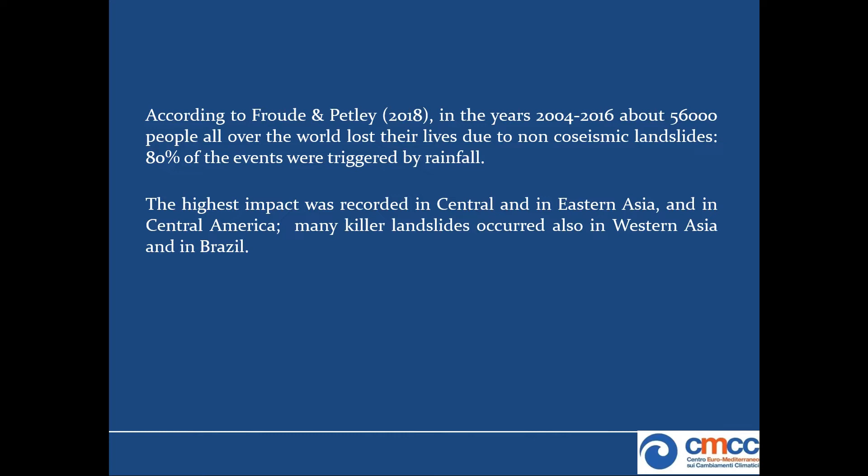A careful survey of the most recent events in the world indicates that the number of casualties due to non-coseismic events in the time interval 2004-2016 has been around 56,000, thus much more than 4,000 per year. The strongest impact has been recorded in Central and Eastern Asia and in Central America. Italy fights for the first place in Europe.

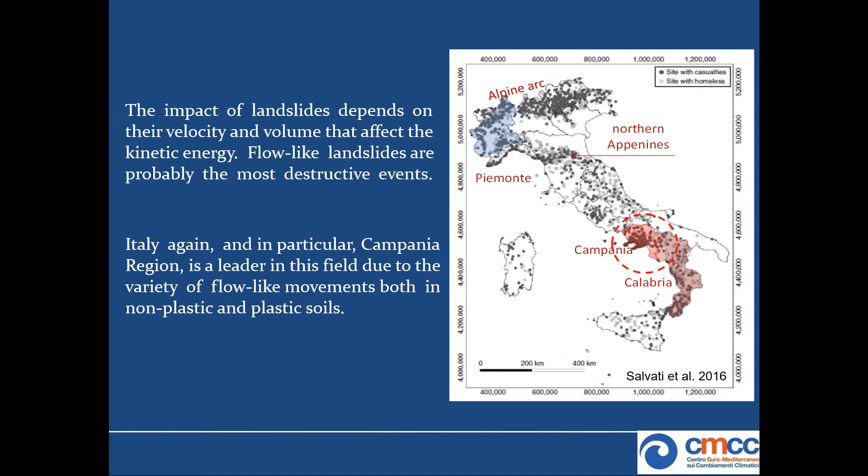Flow-like landslides are probably the most destructive phenomena due to their high displacement rate and often big volumes, thus high kinetic energy. Italy again, and the region where I live, Campania, is a leader for the variety of flow-like movements which involve either granular or plastic fine-grained soils.

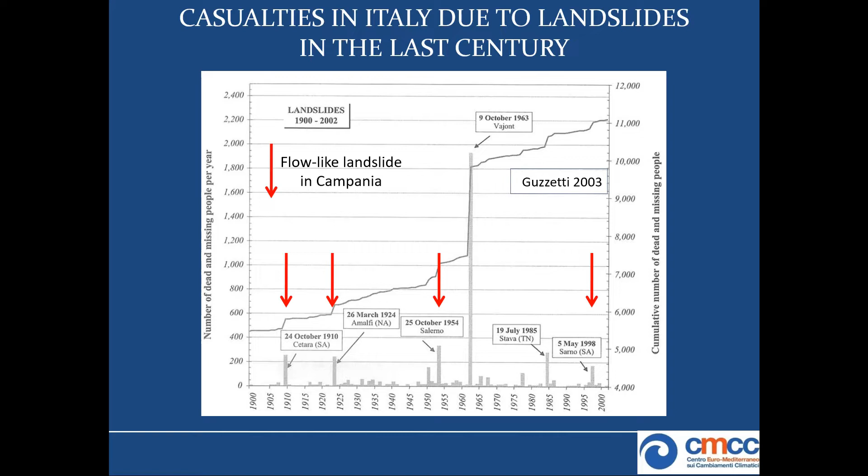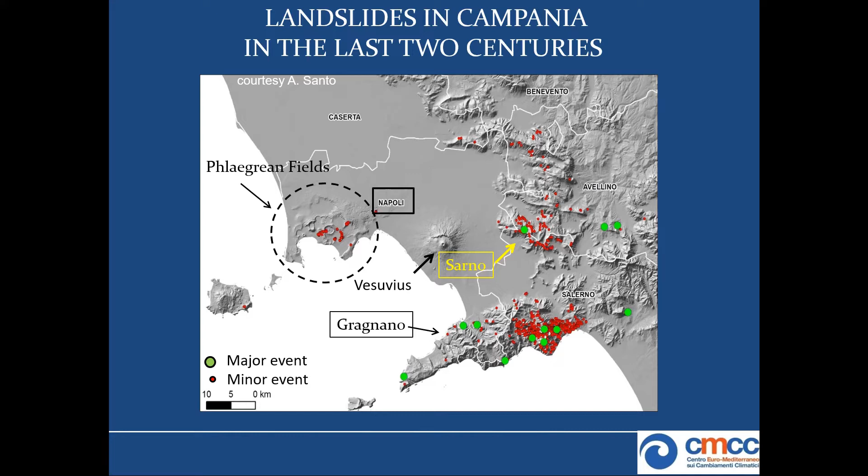This figure shows the location of landslides that occurred in the last 2 centuries in pyroclastic soils in Campania. In the figure, you can notice the position of Naples and of 2 active volcanic centers, the Phlegrean Fields and the well-known Vesuvius, both very close to Naples. The 2 framed localities, Gragnano and Sarno, are the subject of the following 3 slides.

This is the first site, Gragnano, which is famous for the production of pasta. In the figure is indicated the location of landslides that occurred in the 18th century, in the 19th century, and in the 20th one. The figure then suggests the repeatability of these events, some of which caused several casualties.

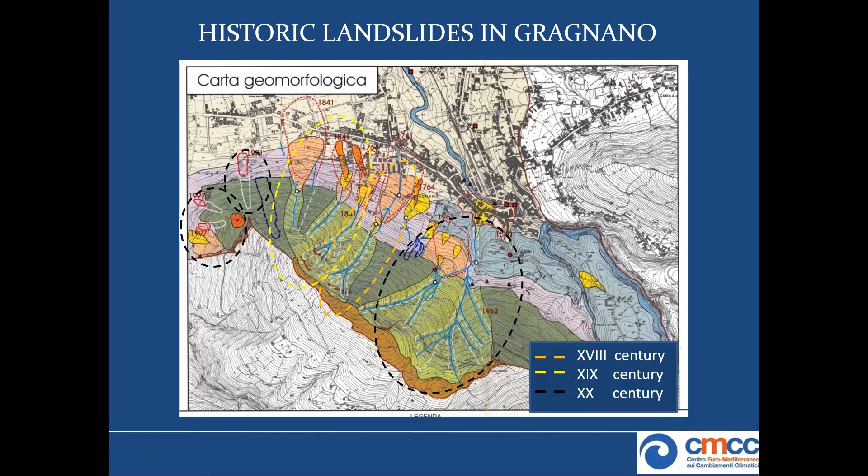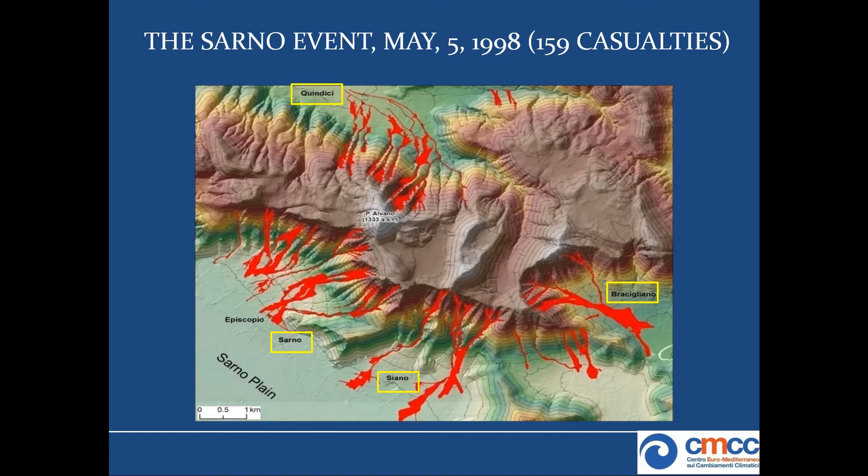It may be useful now to give a look at the typical features of these phenomena. This figure, taken from a book of Brunsden and Prior, depicts the idealized velocity profile, which can be seen also as the displacement profile of a flow-like landslide. It is shown both in plan and in a vertical section. The figure suggests that the soil moves as a liquid mass, displaying a classic parabolic velocity profile. Being seen as a fluid, no shear stresses are indicated at boundaries.

However, remembering that such a profile represents the behavior of a soil mass, the figure suggests the development of high shear strains. An intriguing point is now how to justify at the same time a nil or very low shear resistance at the boundaries of the moving mass and high shear strains within the same soil body.

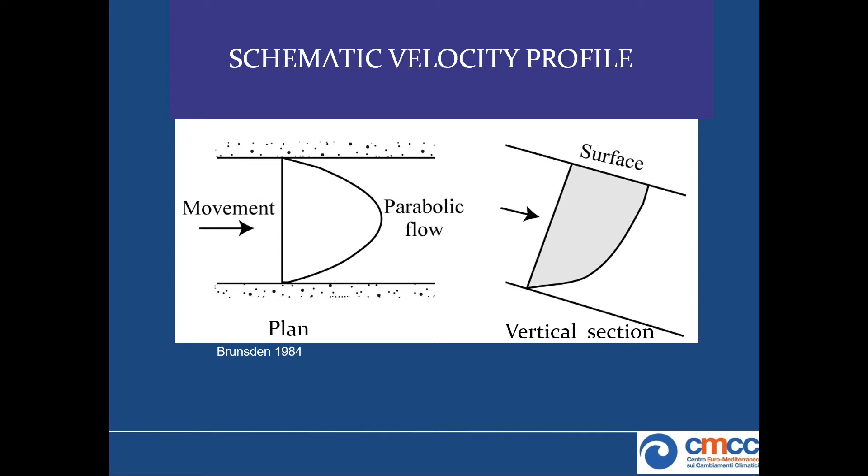The only explanation should be a drop of the effective stresses, which affect both the frictional component of shear strength and the shear stiffness. Such a drop in effective stress might be explained as an effect of a loss of contacts between particles. In a saturated soil, this is possibly due to the building up of high positive excess pore pressures. The drop in strength causes an imbalance between driving forces due to the self-weight of the soil and the decreasing resistance forces. A major consequence is mass acceleration with rapid attainment of high velocities.

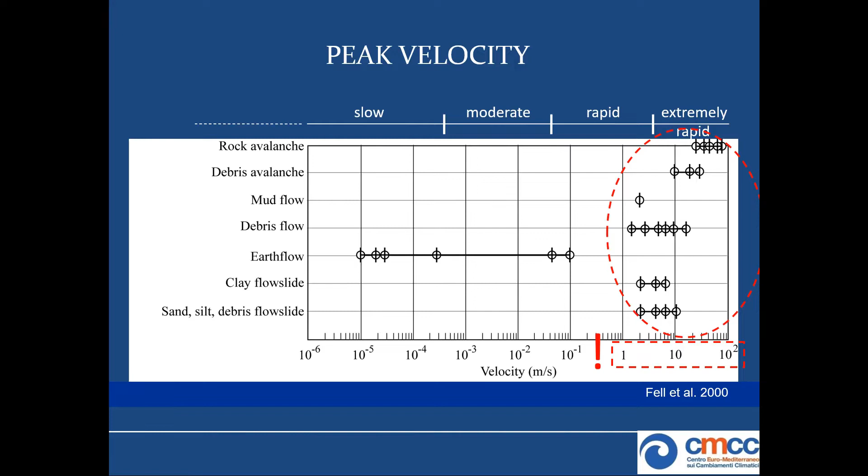This is well demonstrated in this figure taken from a paper by Fell et al., which shows the typical velocities of different types of flow-like landslides. With the exception of earth flows in clayey soils, which can dissipate some energy due to viscous interparticle forces, in all other cases, the velocity reaches values of meters per second.

Now it is time to give a look at the nature of the soils that are the object of this talk and at the features of landslides that occur in such deposits. The soils that fill the plain around Naples and mantle the mountains around are a result of the activity of three distinctive volcanic centers, being volcanic ashes deposited by surges and by pyroclastic flows in areas surrounding the volcano, and by winds, the so-called ashfall or tephra, deposited even 100 kilometers far from the vent.

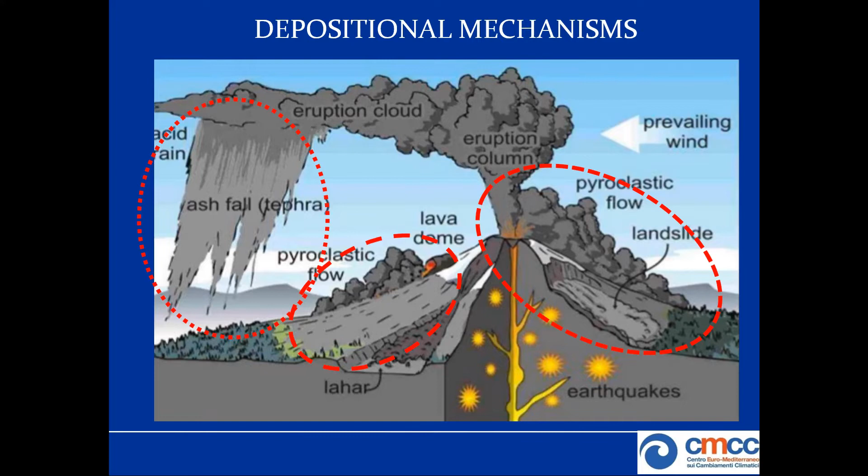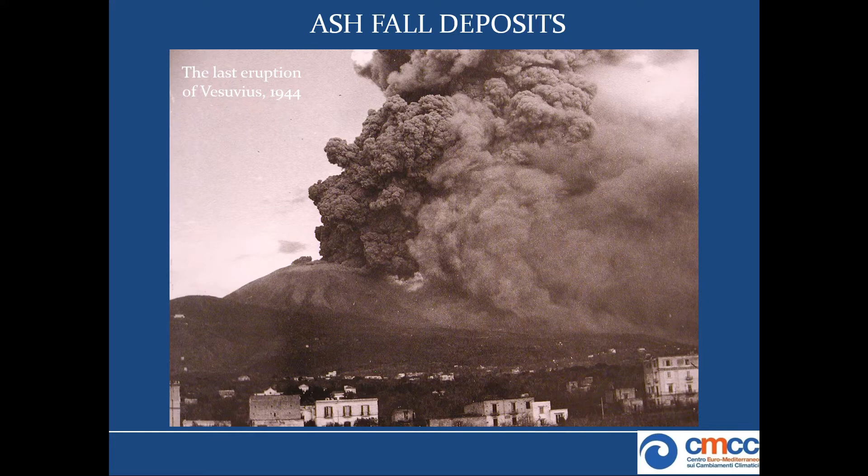The last eruption of Vesuvius occurred in 1944, during the Second World War. The mechanisms of ashfall sedimentation, adding new fresh layers in the pyroclastic sequence, are well evident from these photos.

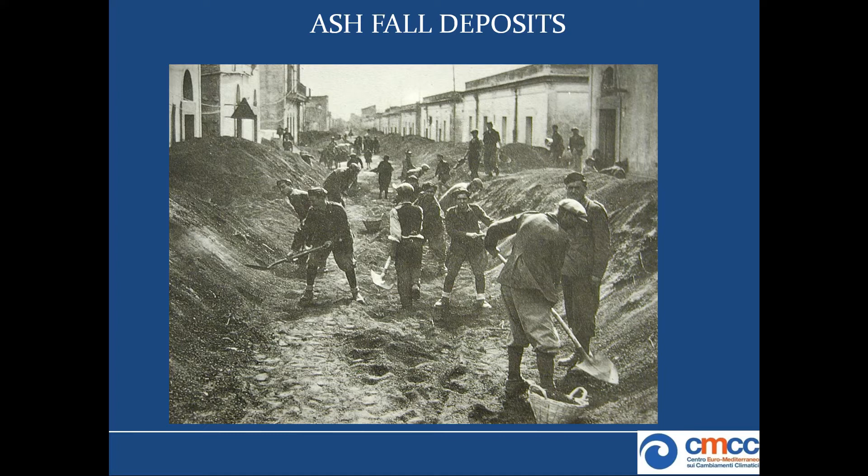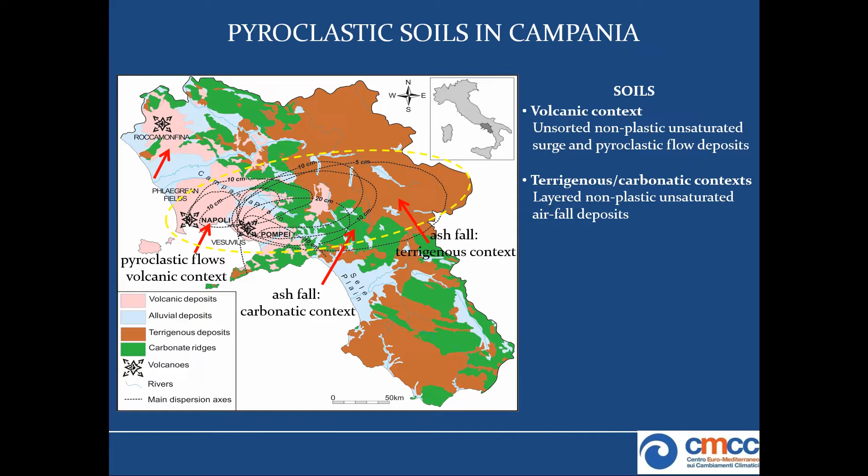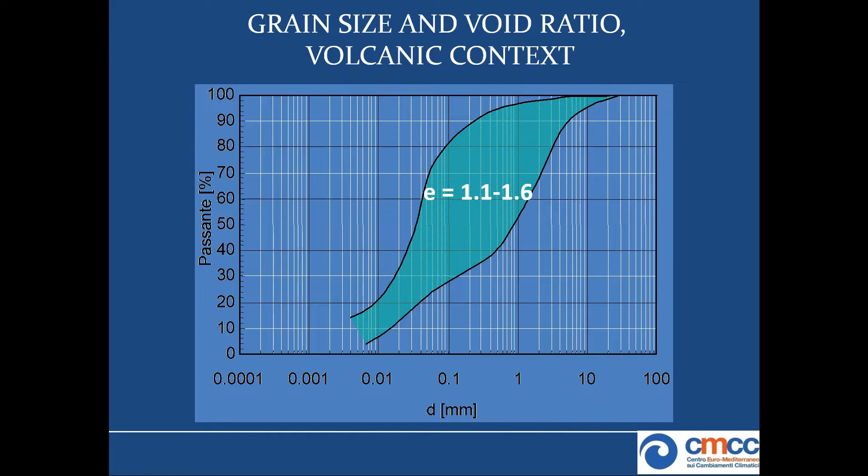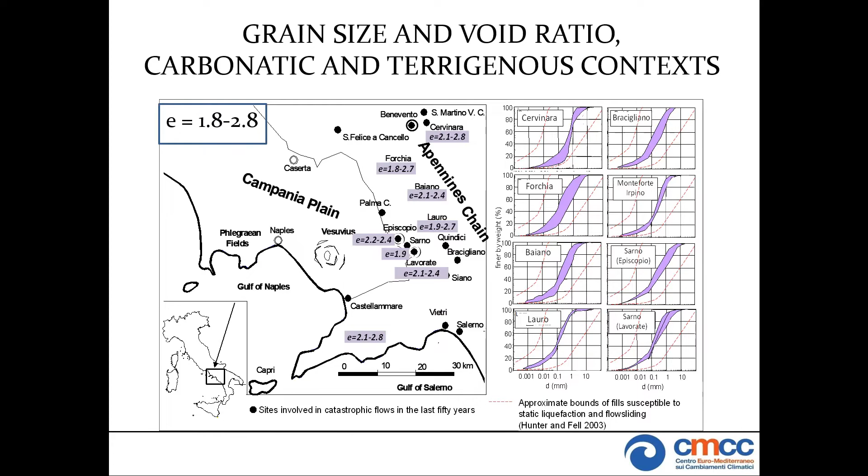Now it is time to give a look to the landslides that occur in these soils. Experience shows that rainfall is by far the primary cause of slope failure. Since these soils are unsaturated, failure is always due to a drop in suction, thus in the apparent cohesion, caused by the increase in water content. Another significant characteristic of these events is that generally they keep the features of flows.

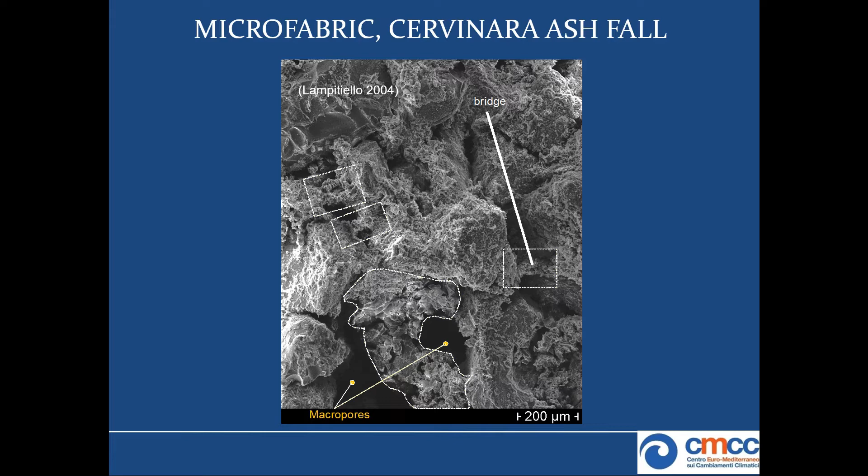Referring to the advanced classification proposed by Hungr et al., these landslides are debris avalanches, debris flows, and flow slides. Debris avalanche is a very rapid to extremely rapid shallow flow of partially or fully saturated debris on a steep slope without confinement in an established channel, while debris flow is a very rapid to extremely rapid surging flow of saturated debris in a steep channel.

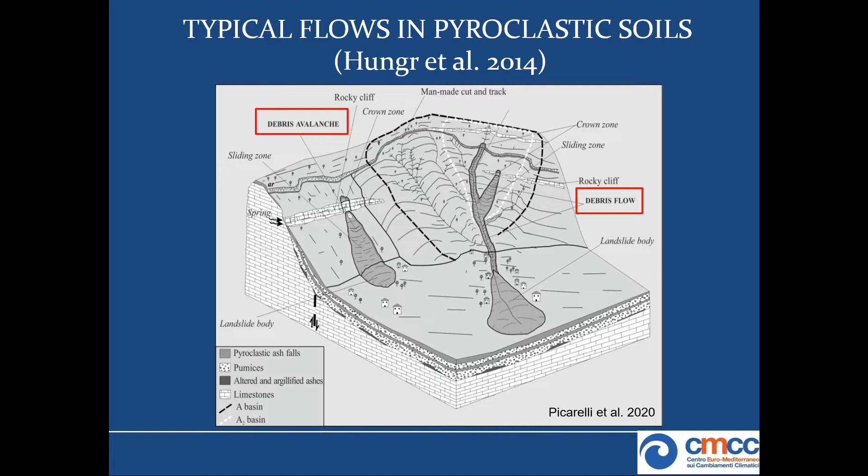Thus, a specific characteristic of debris flows is channelizing. Another typical feature of these phenomena is their strong entrainment capability of material and water along their path. This figure helps, I believe, in well capturing the types of phenomena at hand and the differences between them. This slide shows some recent examples of debris avalanches in the volcanic context, which fortunately had no severe consequences.

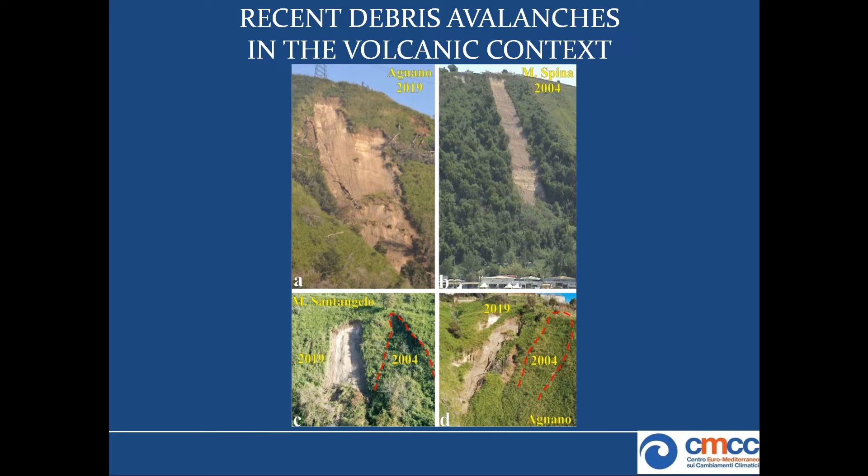An example of debris flow in the carbonatic context is shown in this figure. As you can see, it was characterized by the confluence of three distinct debris flows, every one being fed by different sources. A big soil mass then reached the village of Quindici, located just at the foot of the mountain, killing 11 people.

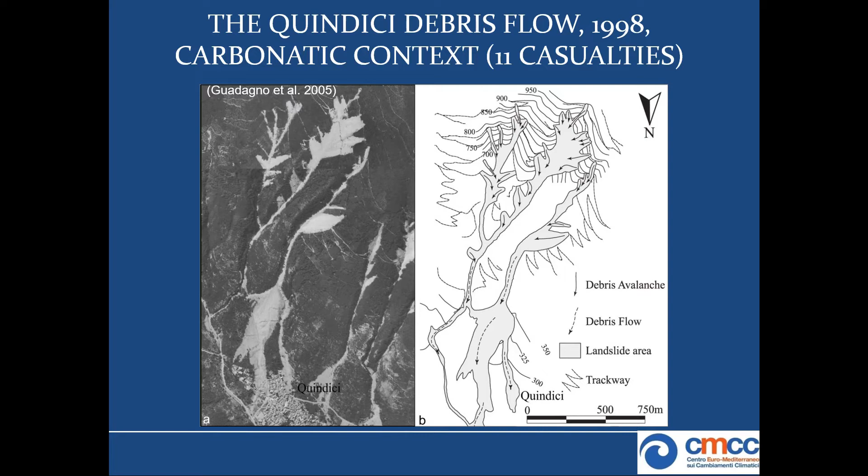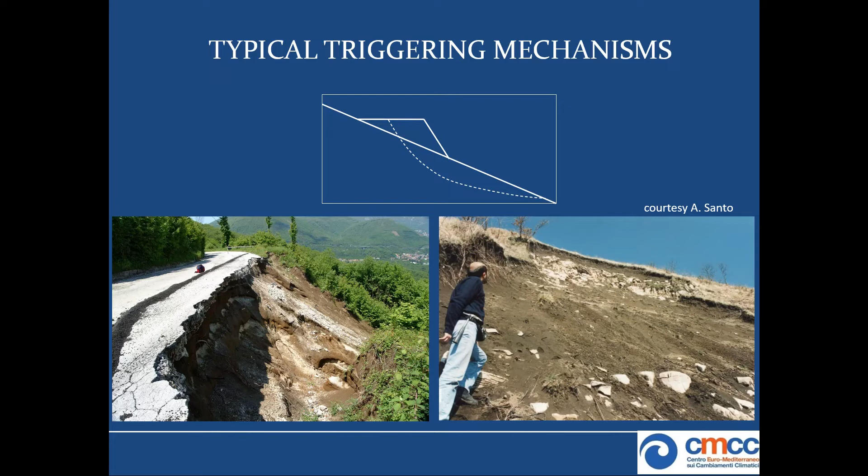The third class of landslides is flow slide. According to Hungr et al., sand, silt, debris flow slides are very rapid to extremely rapid flows of sorted or unsorted saturated granular material on moderate slopes, involving excess pore pressures or liquefaction of material originating from the landslide source. The material may range from loose sand to loose debris, loess and silt. It usually originates as a multiple retrogressive failure.

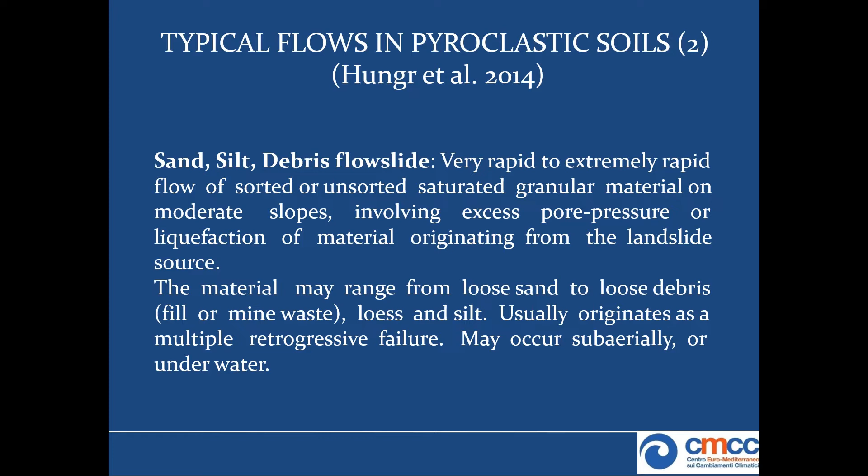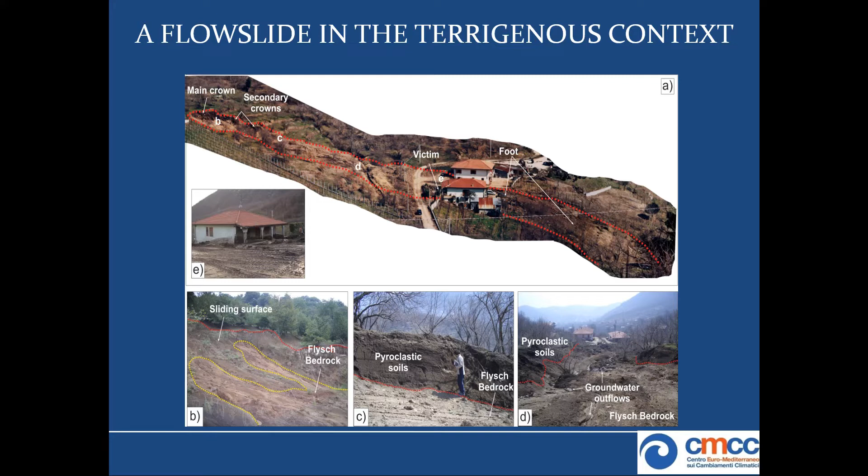Therefore, an important distinct feature of flow slides is the small angle of the slope where they occur, and the fact that they are always characterized by the building up of excess pore pressures. This is an example of flow slide in the terrigenous context, where clay soils outcrop and the slope angles are thus more gentle than in the volcanic and in carbonatic contexts.

In these cases, flow slides triggering may be due to a mechanism of undrained progressive failure originating, for example, from the toe of an earth fill, as shown before, or in zones that are characterized by an even little change in the slope angle.

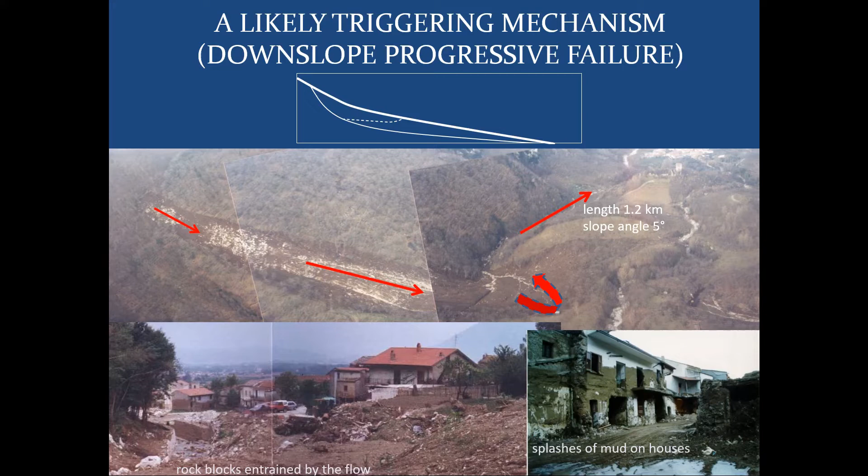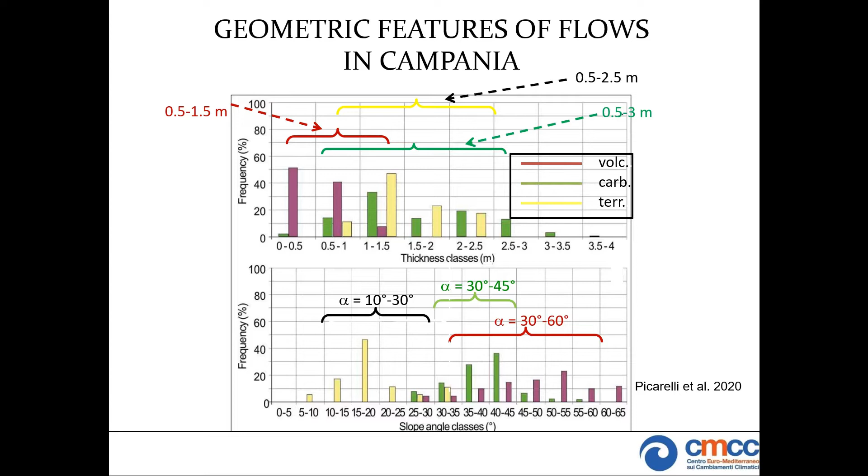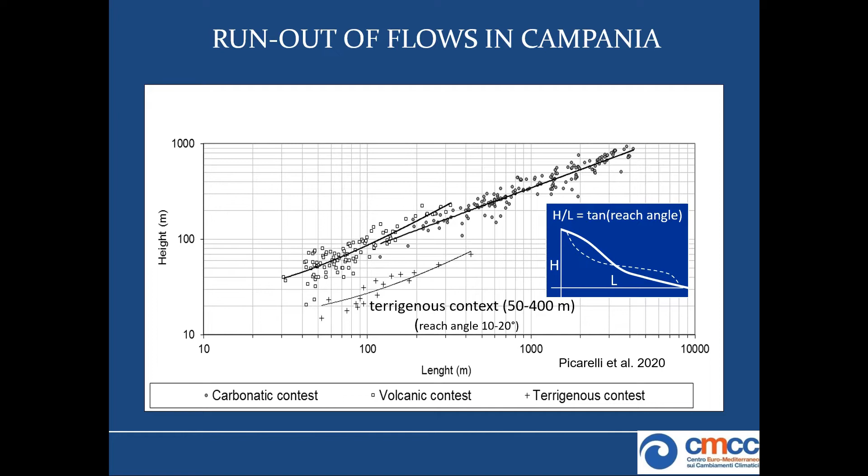In the terrigenous context, the landslide height is of course quite small, thus the travel distance should be quite short due to the smaller slope angle. However, as shown in this figure, the runout that reaches 400–500 meters is comparable to that of landslides in the volcanic context, where failed slopes are the steepest. As a consequence, in the terrigenous context, the reach angle is only 10 to 20 degrees, while it is 40 to 55 degrees in the volcanic context, where the landslide mobility is then much less.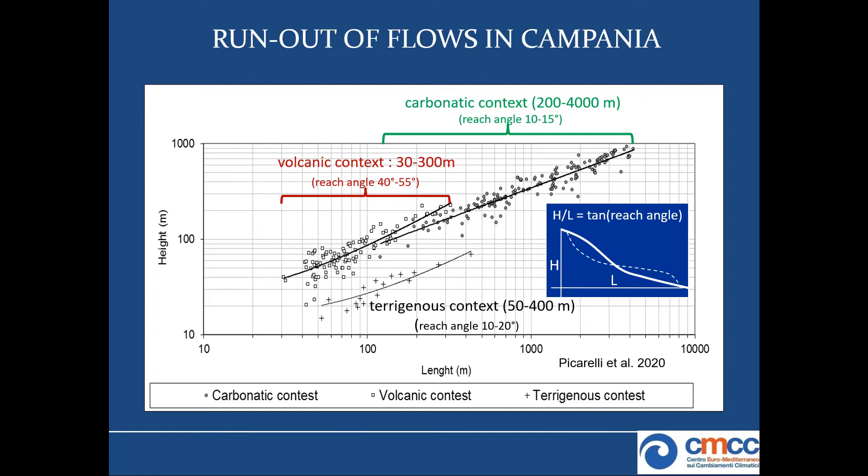Finally, in the carbonatic context, the slope height may reach 1,000 meters and the runout 4,000 meters, leading to a reach angle as low as 10 to 15 degrees. In these areas, the risk is very high. Now, just a short summary on soil and landslide features.

The pyroclastic soils present in the volcanic context were deposited by pyroclastic flows or surges. Their void ratio is generally less than 1.6. The landslides in these deposits are typically debris avalanches and take place on steep slopes having angles comprised between 30 and 60 degrees. The runout is less than 300 meters and the reach angle ranges between 40 and 55 degrees.

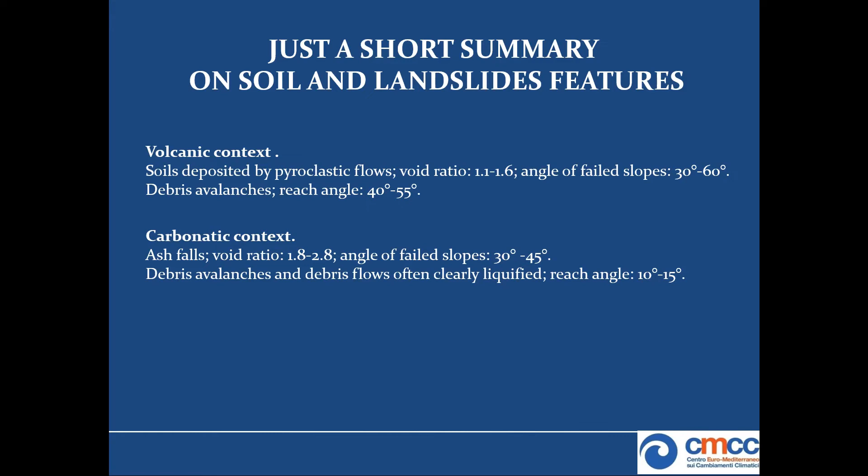The carbonatic context is mantled by ashfalls with a void ratio higher than 1.8 up to 2.8. In this context, the landslides are debris avalanches and debris flows taking place on slopes with angles comprised between 30 and 45 degrees, which show clear signs of liquefaction. The runout may reach 4 kilometers and the reach angle is less than 20 degrees.

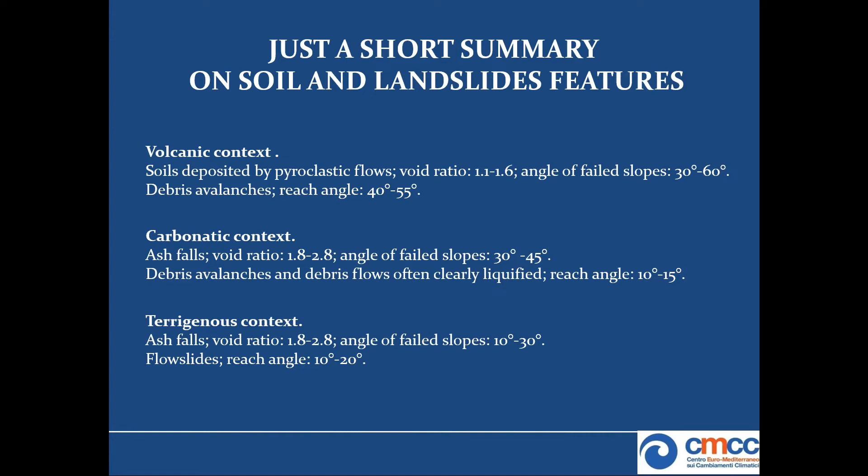The soils in the terrigenous context are ashfall too. Flow slides are usual slope movements that take place on slopes with angles even much less than 30 degrees. The travel distance may attain 400 meters. The reach angle is 10 to 20 degrees. Some data on the mechanical soil behavior can now help us in the interpretation of landslide mechanisms in the different contexts.

This figure shows the results of some undrained triaxial tests carried out on undisturbed samples taken from both the volcanic and the carbonatic context. As shown, they present similar shear strength parameters, namely nil effective cohesion and a friction angle equal or a little bit higher than 35 degrees. The role of the void ratio on the mechanical response is, however, different and well evident. In fact, in the first case, volcanic context, the soil response is ductile, while in the second case, carbonatic context, it is brittle.

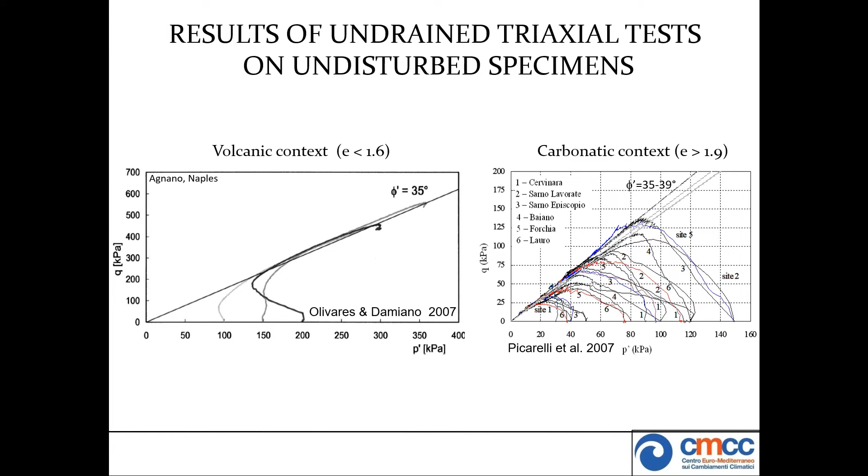Further interesting data are displayed by this figure, which shows the results of undrained triaxial tests after isotropic or anisotropic consolidation, carried out on specimens reconstituted at different void ratios within the typical range of values that characterizes ashfall. As already highlighted, all tests show a highly unstable soil behavior.

An additional and clear information is that the peak strength is attained well below the steady-state line SSL and is followed by a strong drop in shear strength that leads the shear stress to attain the steady-state line under a very low mean effective stress that indicates the occurrence of soil liquefaction. The area between the envelope of undrained peaks of specimens having the same initial void ratio and the steady-state line SSL is the well-known instability region.

As shown in the figure on the right that reports the results of tests on specimens anisotropically consolidated within the instability region, any even minor stress change under undrained conditions can lead to a fast and strong loss of strength.

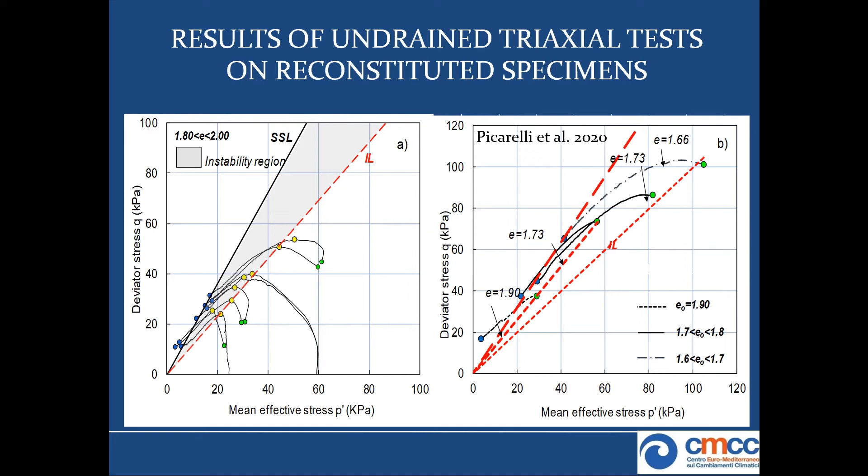This figure shows the instability lines of specimens characterized by different void ratios. The higher the initial void ratio, the lower the instability line. The mobilized friction angle of specimens having a void ratio in the range between 1.8 and 2, namely typical values in the carbonatic and terrigenous context, is less than 30 degrees, a value that is much less than the critical friction angle. These data, of course, shed light on the behavior of tephra that mantles wide areas in the carbonatic and terrigenous contexts.

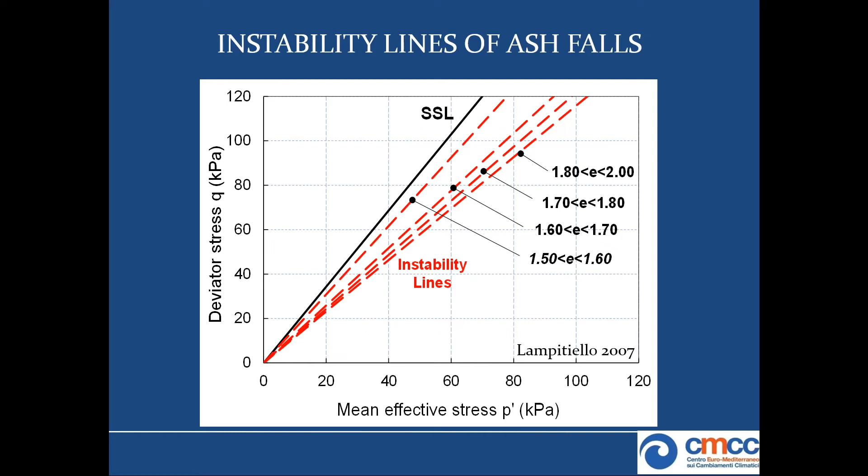Finally, this is the compression plane of volcanic ashes obtained through a number of drained and undrained triaxial tests. You can recognize both the isotropic compression line ICL and the steady-state line SSL. The gray areas in the same plane show the range of values of the void ratio of samples taken from both the volcanic and the carbonatic context as a function of the presumed in situ mean effective stress after full soil saturation.

As shown, the range of values in the volcanic context is located well below the steady-state line, while the range of values of ashfalls is above that line. This, of course, is consistent with the results of triaxial tests shown before.

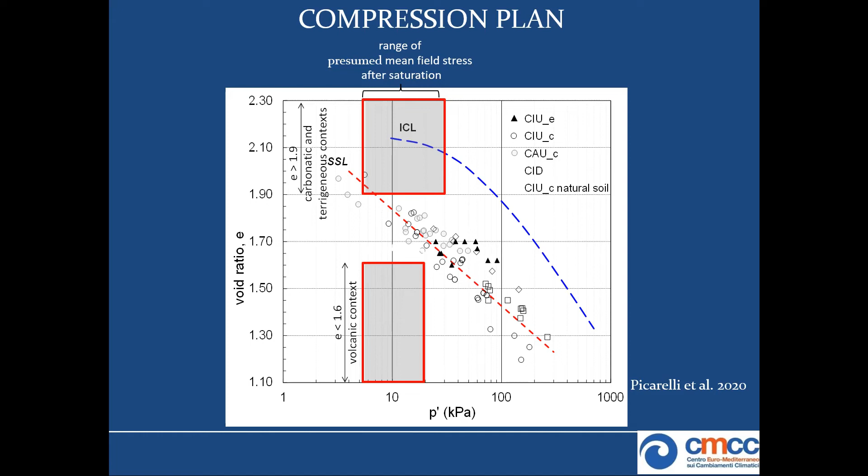All previous data allow us to propose a mechanical interpretation of the landslides at hand. Due to the small depth of the pyroclastic covers, a first consideration is that the model of the infinite slope is suitable for simple analysis. Moreover, considering that rainwater infiltration is by far the first cause of failure, and accounting for the range of values of the friction angle, the model of the infinite slope allows us to easily calculate the apparent mobilized cohesion at failure. The results of this simple analysis are reported in the next slide.

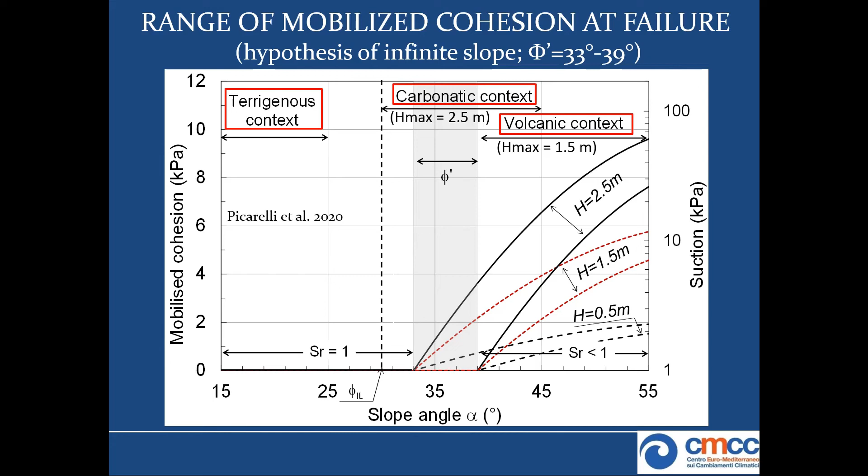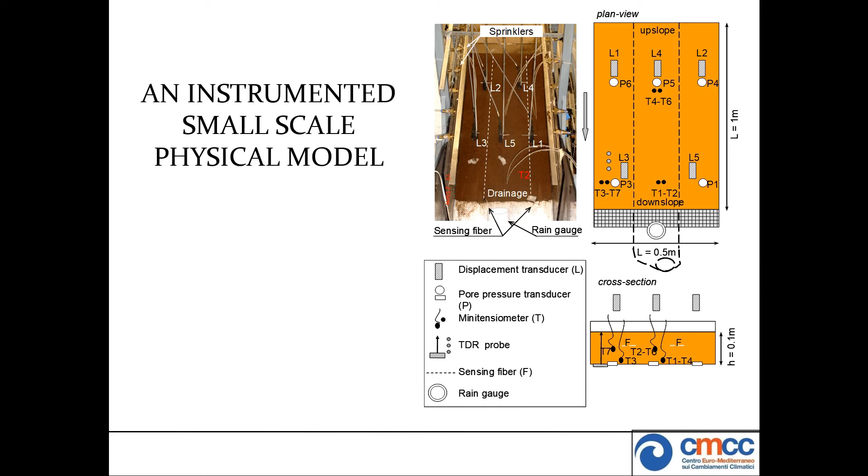This slide reports some results of an experiment conducted on a model slope having a porosity of 70%, an angle of 40 degrees, and a void ratio of 2.3. The slope was subjected to artificial rainfall.

As shown in the plot on the left, soil suction, which initially ranges between 60 and 70 kilopascal, rapidly decreases as a result of wetting. The effects of wetting are displayed first by the response of the tensiometers installed at mid-height in the layer, then by that of the deepest ones installed at the base of the slope.

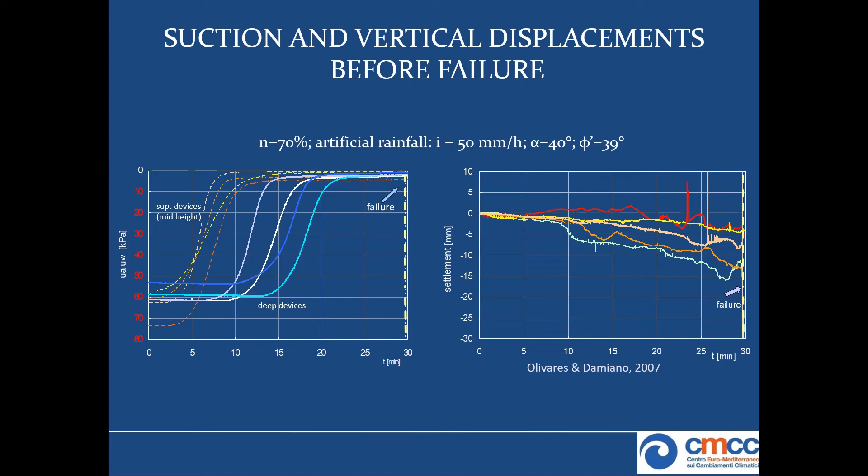The figure on the right shows vertical displacement of the ground surface, which increases as the water content increases and suction decreases. Failure occurs after full soil saturation.

This figure shows the records of positive pore pressures measured by 3 sensors installed at the base of the layer. The pore pressures start to grow 1 to 2 minutes before failure. This occurs suddenly and is immediately followed by a jump in pore pressures, which are magnified in the figure on the right as a result of a process of spontaneous liquefaction justified by the high void ratio of the soil.

Interestingly, based on measured pore pressures, we have calculated an upward hydraulic gradient of 0.5, which coincides with the critical hydraulic gradient, thus indicating the occurrence of a quick condition due to complete vanishing of effective stresses, a mechanism that can be recognized as soil fluidization.

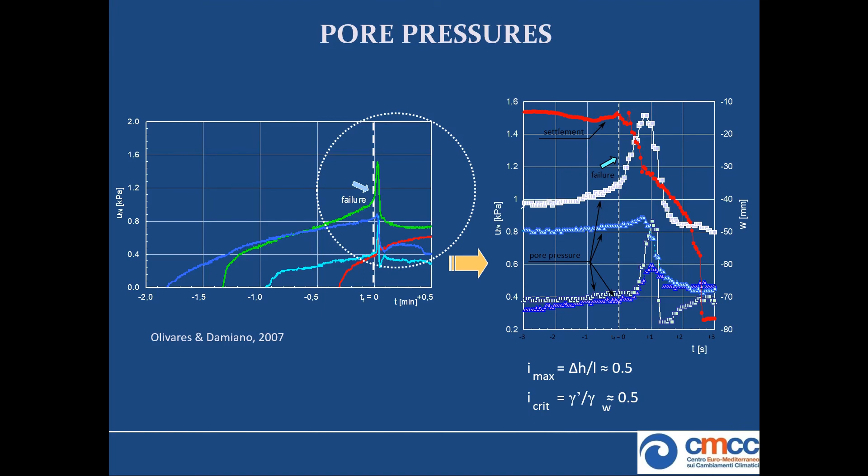The second example concerns an experiment aimed at reproducing downslope progressive failure. In this case, the slope consists of two parts. The uppermost one, 40 centimeters long, has an angle of 42 degrees. The lowest part, 1 meter 50 long, presents an angle of 38 degrees. The void ratio of the soil is 2. In such a case, too, failure was induced by artificial rainfall.

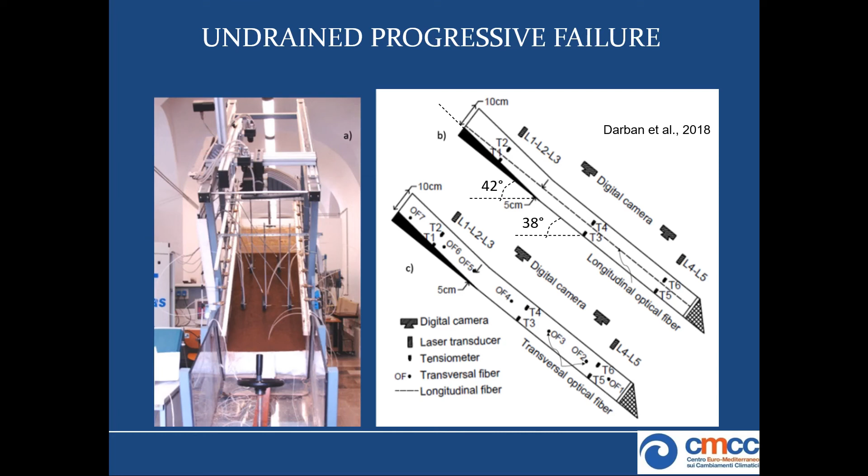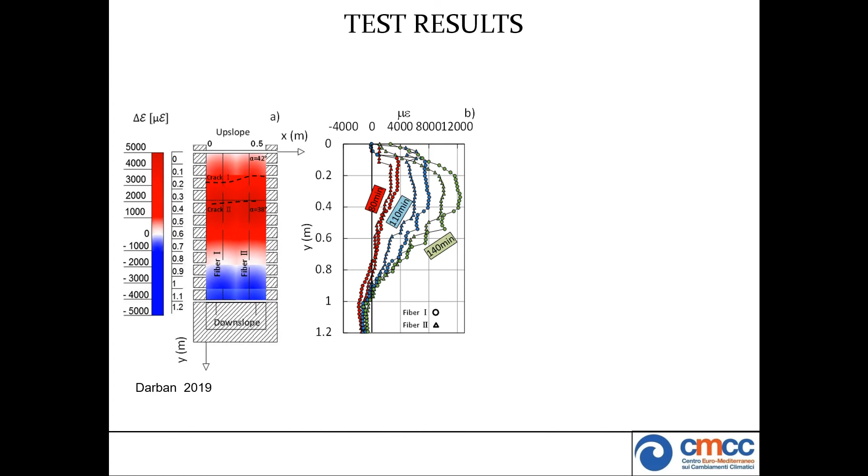This figure shows the results of monitoring with an optical fiber that highlights a mechanism of downward compression at different times in the pre-failure stage. In turn, the figures on the right show the rate of displacement at 5 monitored points along the slope axis and the pore pressure measured at 6 points.

Even though the differences in displacement rate do not appear so evident from point to point, the first figure confirms a progressive downslope movement, while the other one, the lowermost in the figure, highlights the sudden building up of excess pore pressures.

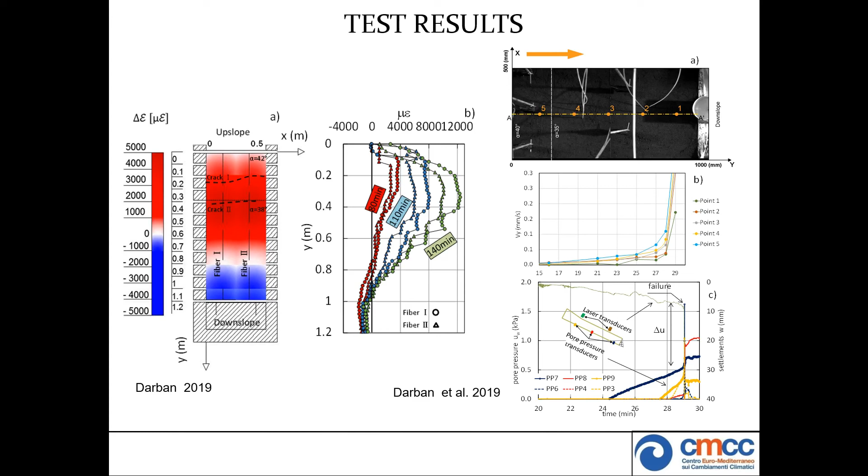Now, some conclusive remarks appear useful. First, the cause of landslides in these unsaturated deposits is the decrease in the apparent cohesion due to rainwater infiltration. In the volcanic context, where the soil presents void ratios less than 1.6, slope movements are mainly debris avalanches on steep slopes with quite a high slope angle. Failure should occur before full saturation. Liquefaction is unlikely, also because of the ductile undrained soil response in saturated conditions.

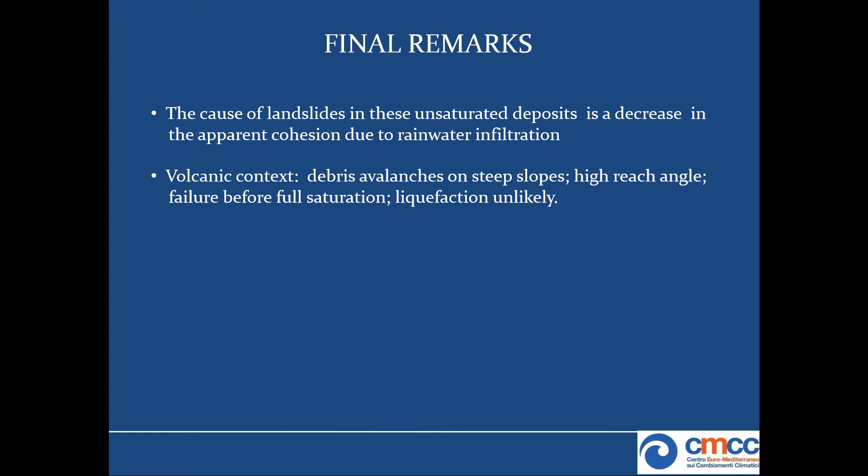In the terrigenous context, typical slope movements are flow slides with a low reach angle, thus a high mobility. Failure occurs after full soil saturation, possibly within the so-called instability zone as a result of mechanisms of spontaneous liquefaction or of progressive failure.

The landslides in the carbonatic context are debris flows and debris avalanches on moderate to steep slopes. The reach angle is small. Failure is likely to occur after or nearby full saturation. Liquefaction is a likely process triggered by impacts or by downslope progressive failure.

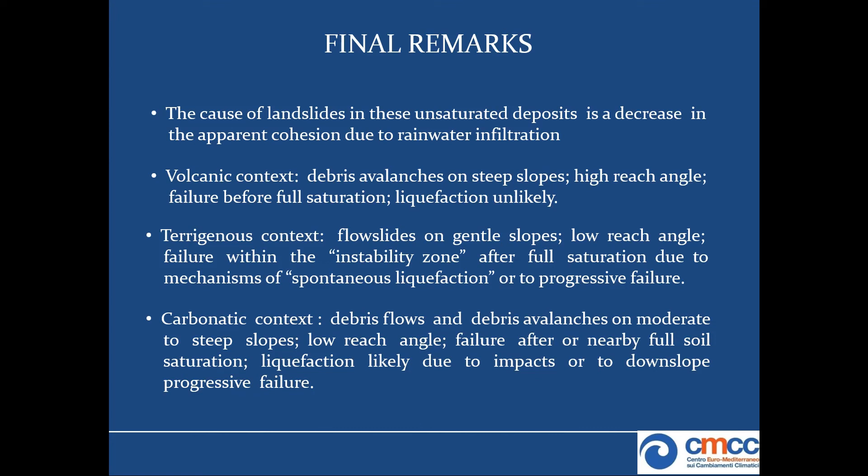As shown, landslide hazard is very high all over the part of the region that is mantled by volcanic ashes. Especially in the last 20 years after the catastrophic Sarno event, some structural and non-structural measures are being adopted for risk mitigation. The non-structural measures consist in early warning systems essentially based on weather forecasting.

The structural measures often consist of check dams built in mountain creeks, in order to reduce the kinetic energy of debris flows. A major problem, however, is the size that many landslides can soon reach, making sometimes check dams of little value.

In some cases, metallic fences with wire ropes attached to steel posts and anchored to the bedrock have been installed within the pyroclastic covers in areas susceptible to failure, in order to prevent slope failure, which might lead to catastrophic landslides.

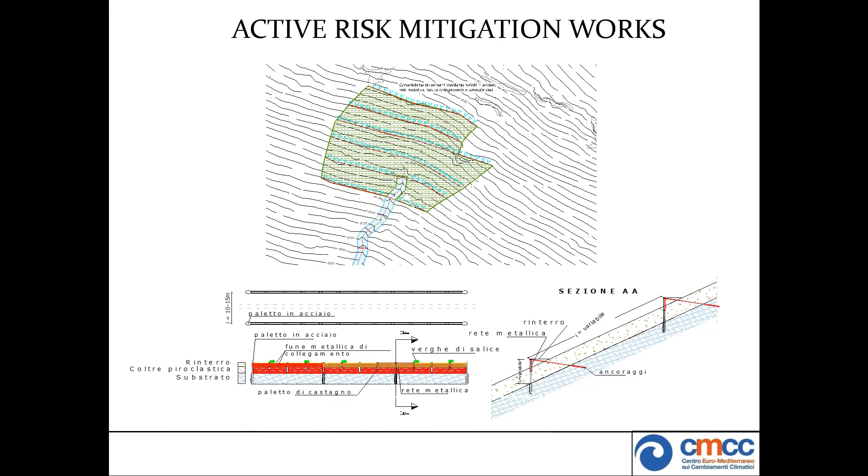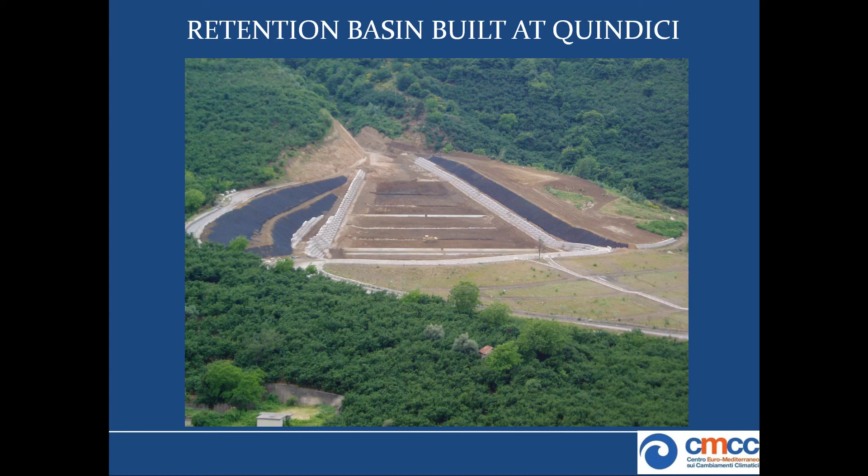Other mitigation works are large retention basins built along the presumed flow path. The town of Quindici, for instance, has been protected by a retention basin located upslope of the urban area. The town of Sarno, too, has been protected by 3 distinct retention basins built just upslope of the town.